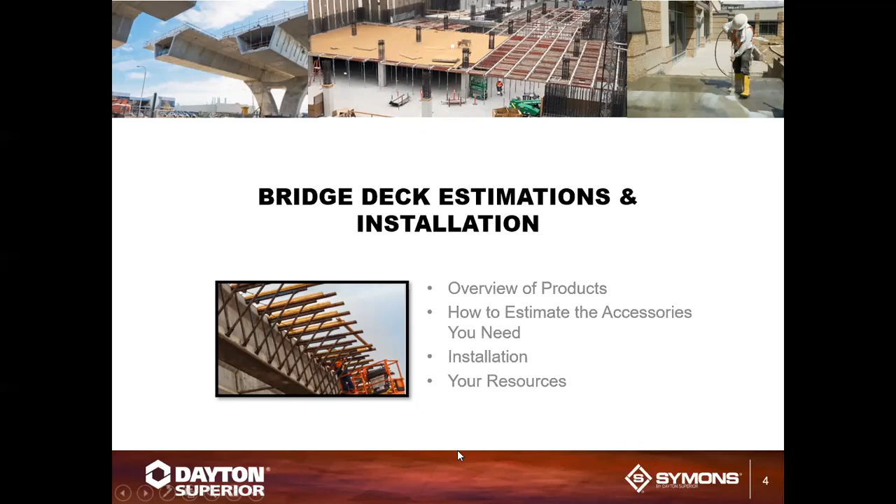So the bridge deck product here, we're going to be talking a little bit about cast in place, precast, steel, wood, concrete, supported on concrete or steel girders. We're going to talk about the sheathing, the joists, the ledgers. Those items typically aren't seen as often as they used to be because now most of the decks are actually going with either a composite fill or concrete plank or an SIP decking.

SIP means stay in place, corrugated metal decking. But we'll talk a little bit about overhang brackets and the accessories that are needed, all the formwork that goes with it, walkways, paving machine loads, because that is a huge product item, especially when you're talking about bridge deck.

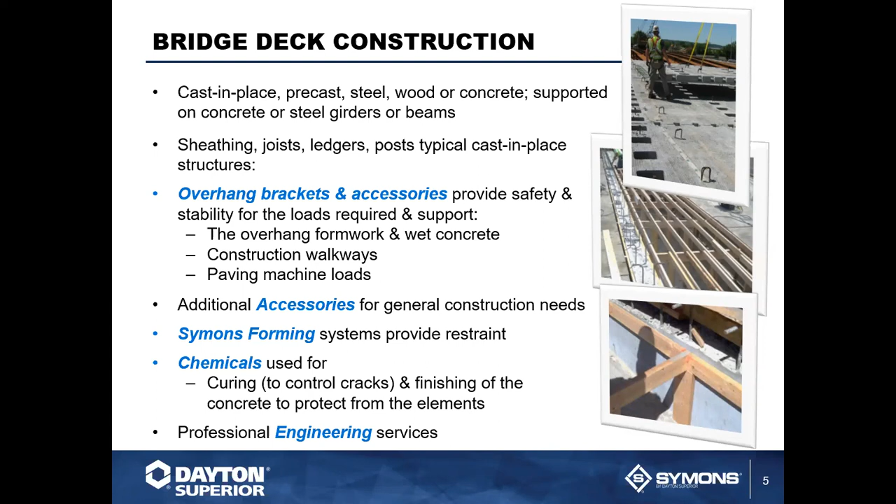Additional accessories, basically, that are going to be required and used. We'll talk a little bit about Symons systems that are relevant within the system, and obviously chemicals, curing to control and finishing the concrete to protect from elements. And then obviously we're going to talk about our engineering services.

So let's start with the overhang brackets. Overhang brackets, the C49 standard bracket, probably the most copied bracket in the marketplace. This bracket has been around for about 40 years now.

It is used basically continually across the country. You can adjust this bracket from 14 inches to 30 inches, or if you go with the deep bracket, you can go up to 70 inches with it.

We also have the S bracket, which is the field modification of that C49, where you're actually going to take it from 30 inches, which is the standard length, down to about 14 inches. And that can be done with basically a removable one pipe.

We also have our junior brackets, which typically are used in those tough to fit locations where you don't have 4.5 feet between the old structure and the new structure. Or if you're doing work downtown, you may not have 4 feet between a building and the edge of the bridge. So the junior bracket comes into place.

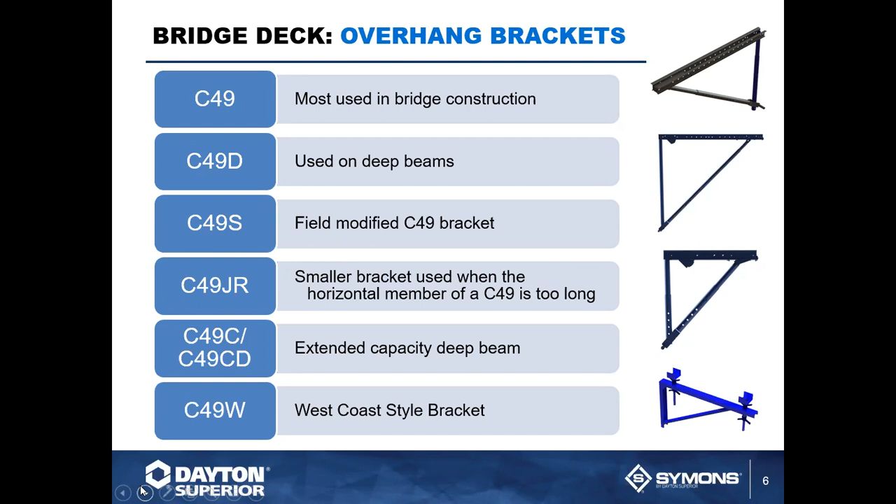Well, supporting all those brackets actually comes from the hanger. The hanger is actually one of the key components, what I would consider the second most important part, because it's the one that actually holds the bracket in place for the overhang. And the brackets can come in a multitude of different styles and configurations. Here we just have about 6 or 7 different configurations.

We can actually, all the hangers are typically made to order. We do not stock any hangers on the shelf. If we have any on the shelf, it would be a C24 style hanger, as those are the most common half hangers. But whether or not it's a type 1, type 2, etc., would be based on your location.

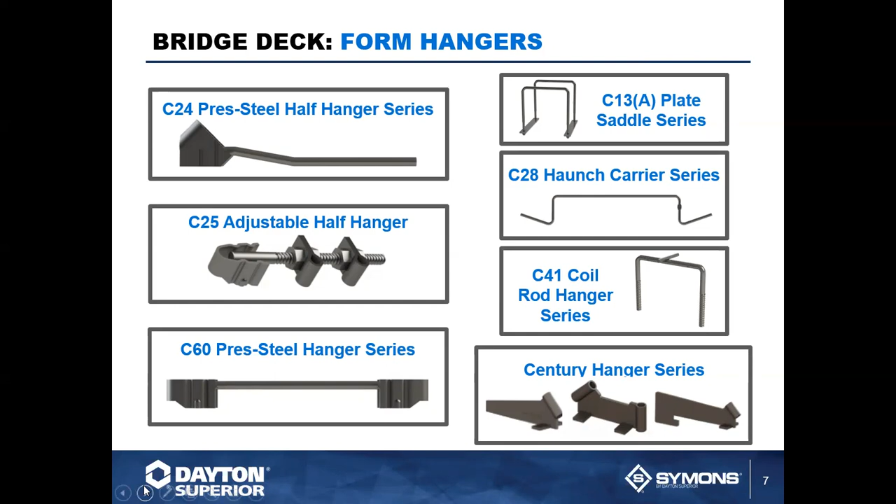With those hangers, steel beam requirements, we've got hangers that will wrap around steel beams, straddle over the top of them. We've also got precast hangers that cast in place in the concrete, and you can get those with a 45 or 90 degree end clip.

The end clip is what decides what the hanger is going to be used for. Typically, a 45 degree clip is used for an overhang bracket, connecting to an overhang bracket. A 90 degree is typically attaching to a wood forming member.

We can do precast hangers, and once again, they are made to order. The standard is a 6x4x2, but we can do those hangers up to 48 inches by 6x2, just so you get back in that concrete platform of the deck of the bridge beam, where you have enough meat to actually hold that anchoring force.

We can put steel plates on the end underneath the clips to spread the load design out on the edge of the girder, so you don't have to worry about chipping the concrete girder. And once again, these are all made to order.

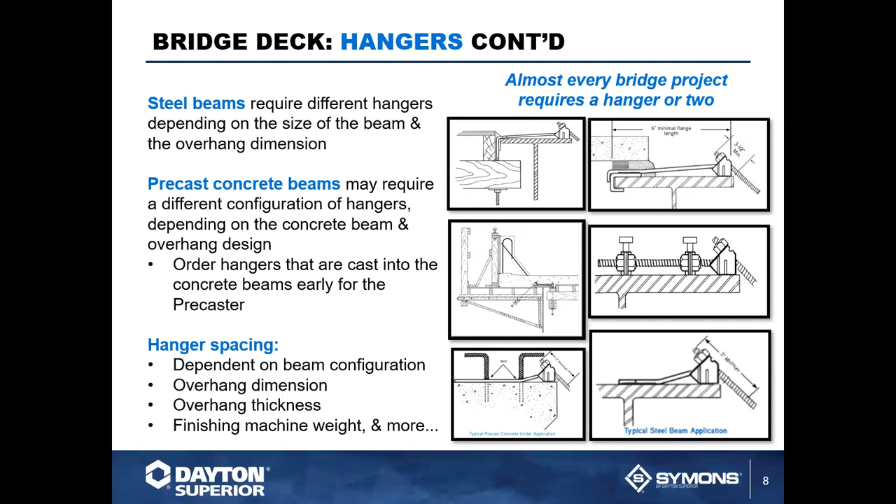So typically what you've got is 1/2 inch by 24 adjustable coil bolts that are going to be used. Those are a preference that I have in the marketplace. It is not the only item that can be used. This is what holds the overhang bracket to the hanger.

I like it because it has the adjustable nut on it, but what it also gives you is that one nut at the very bottom that is welded. When you're ready to strip the bracket, that enables you to loosen it up with a wrench, so you don't have to damage any of the threads, making this component piece reusable.

24 inch is preferential. I've seen guys come in with 18 inches, then try 20 inches. I like the 24 because that fits whether or not you have to have a high haunch or low haunch on the overhang, whether the bracket is sitting flush or if it's sitting down just a little.

The adjustable coil rod will actually make that bracket easier to adjust. You can also use standard B12 coil rod with a nut in lieu of that, but to strip it, you're going to have to muck up the threads on the coil rod to get it loose. You'll have to hook onto it with a pair of vice grips or a pipe wrench to actually break that loose.

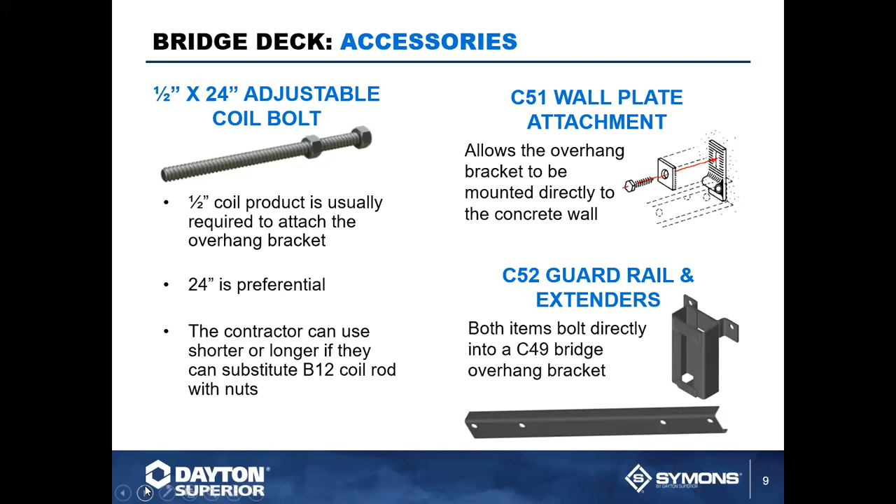So then we have bar supports. Bar supports are the next important item that we have in the deck.

Typically, whether you're forming on concrete plank, wood decking, or SIP decking, we can supply the slab bolster for that need, whether it be galvanized, epoxy coated, stainless steel, all plastic, etc. We have a complete array of slab bolster, including the plain metal version, which we don't see a whole lot of anymore, but most of the jobs are going typically epoxy coated or galvanized.

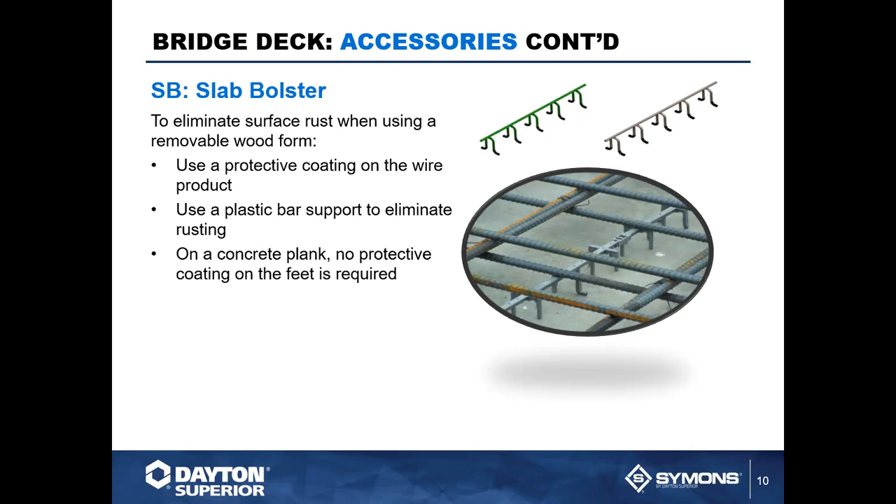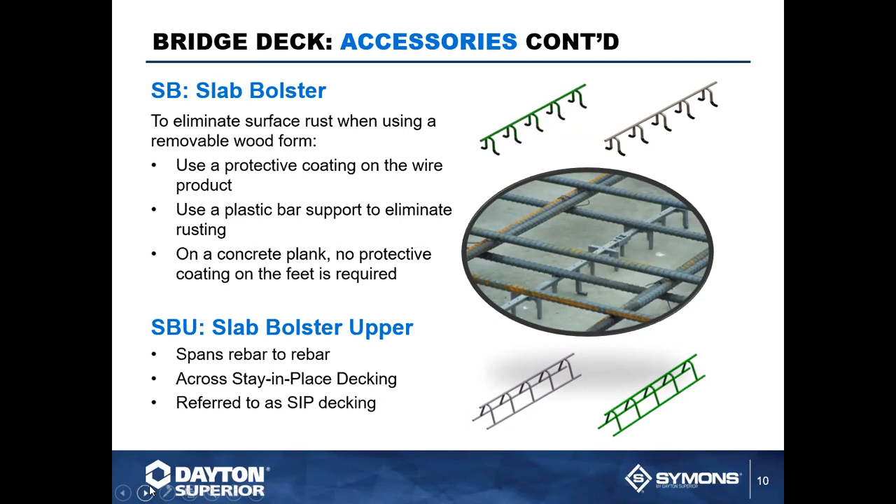We also have the upper material. Once you put the lower material on to touch the formwork underneath, which will typically have a plastic barrier on the feet, you go to the second mat, which needs to be supported by slab bolster upper. Slab bolster upper is a critical component because with SIP decking, you're going to use slab bolster upper on your lower deck and on your upper mat of rebar.

So let's talk about how do we estimate the deck. Well, typical bridge deck. You're going to look at a set of plans here. This is a typical Ohio bridge. This is a plan view of the deck or a detail of the beam.

You've got basically the framing plan from end to end located on this one. You'll also see that we have here our steel. This is a steel beam structure, and the steel beam is detailed out here.

Now a lot of times when you use steel beams, the steel beams typically will come in a couple of different forms or fashions. It will have a build-up girder or will be a standard extruded beam. If you have a build-up girder, there's a good chance you're going to have multiple hanger widths on it because the beam flange on the top side of the girder is going to change. And they will typically change in both the tension and compression zones of the bridge.

And what we're concerned with is what's going to happen up on top. Typically in a tension zone, because of the way the camber is of the bridge, it's basically an arc going up over the bridge. And when the concrete gets on it, that beam is going to settle out. What happens is the concrete beam actually has to have those tension and compression zones stretch and contract into areas, so that when the beam flattens out, we don't do any damage to the girder itself.

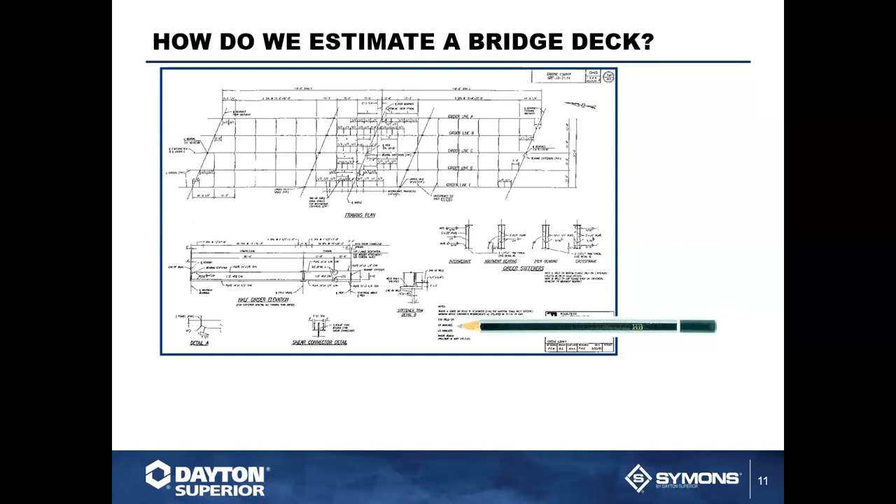So here, you also will have a section view. The section view is now going to give you all the other details that you need for how to calculate the overhang bracket. There's a bunch of information on this page. Realistically, these are probably the two most important pages on the plans that you will need for a bridge takeoff.

Typically, this is going to give you your overhang, your rebar size, your rebar coverage on the top from the top of the concrete deck to the rebar, and also from the bottom of the concrete deck to the bottom of the bottom mat of rebar. You will have to calculate the space in between.

I would recommend going to the how to calculate slab bolster presentation that we did a while ago here for a Training Tuesday. That will actually help guide how you actually run that figure. But you'll also get all the rebar sizes, any lap lengths, any special conditions within the deck, all listed on these pages.

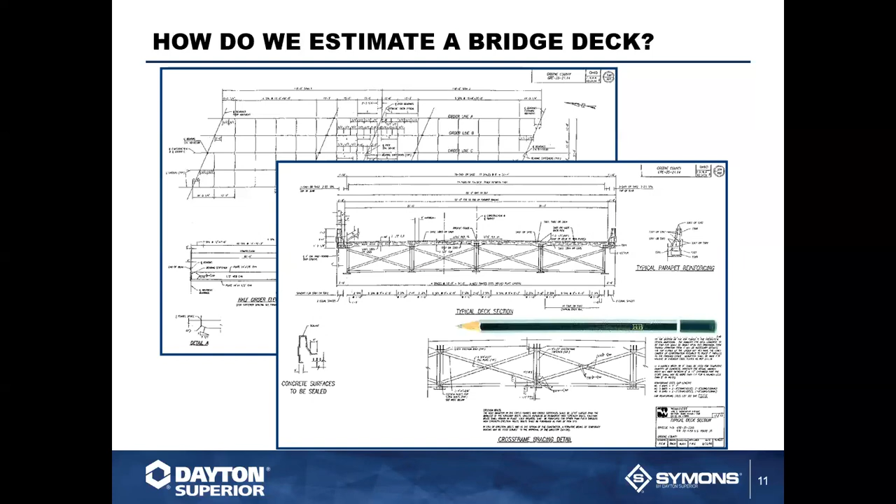So let's build a quick estimate here. Remember, when you get your plans - yeah, I had a guy send me about 4,000 plans, that's 4,000 pages the other day. Of the 4,000 pages, I think I needed 3 pages to actually calculate the deck, to do the whole deck calculation form. So you don't really need to have the whole set of plans. You're basically just looking for that section view and the plan view of this product line.

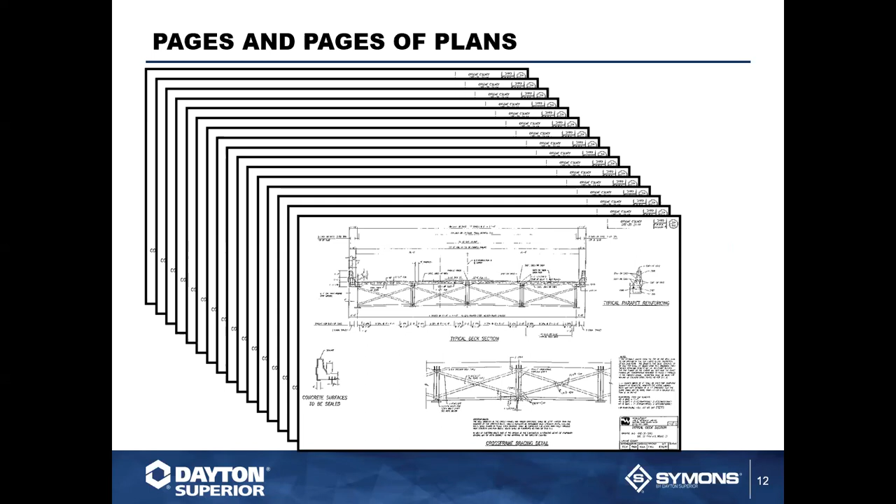So basically what you're looking for is the overall length, the girder details of spacing, the deck thickness. Obviously the concrete thickness of the deck is going to play an important part on the weight that's put on the overhang bracket and the hangers.

The width of the bridge comes into play because of the finishing machine. The finishing machine is not your friend. The weight of the finishing machine is probably 85 to 90% of the weight that the overhang bracket will have to support. So with today's wider bridges, because we're having to build bridges wider and wider as we keep adding lanes to highways, you end up having a heavier finishing machine.

When the finishing machine starts to get up around 2,500 to 2,800 pounds per wheel, well, that only leaves you 800 or 900 pounds per lineal foot of concrete that you can add. So you're talking, you've lost a lot of capacity of the bracket because you're having to take into consideration the weight of that finishing machine.

So with that being known, the contractor will have to give you that information. That is something that cannot come from Dayton Superior or any of the dealers out there that are looking at it. This is something that the contractor will have to give, because we don't know what kind of options they have on their finishing machine, etc.

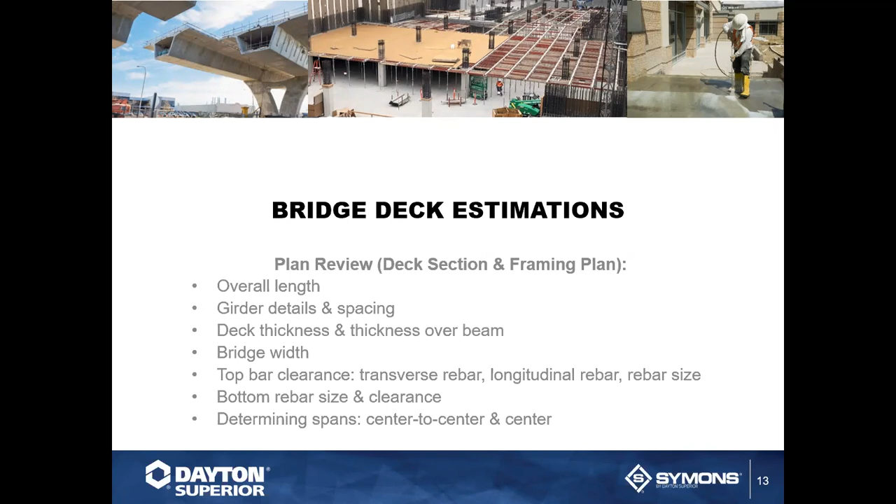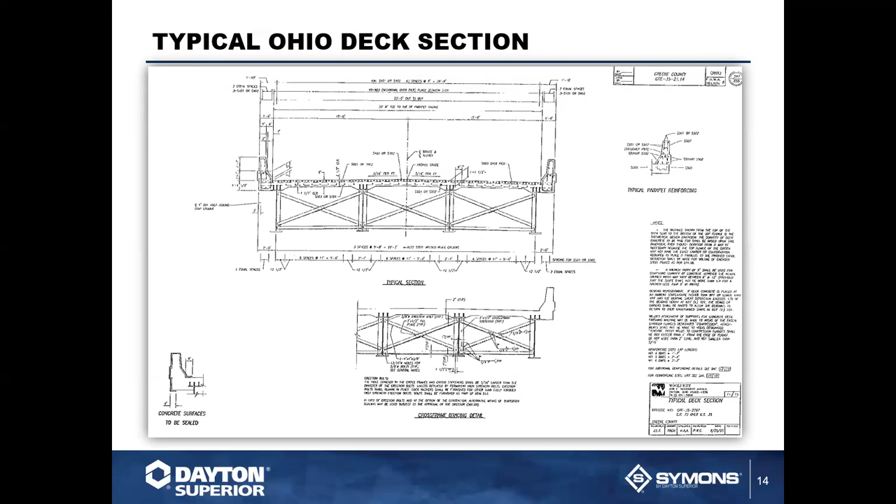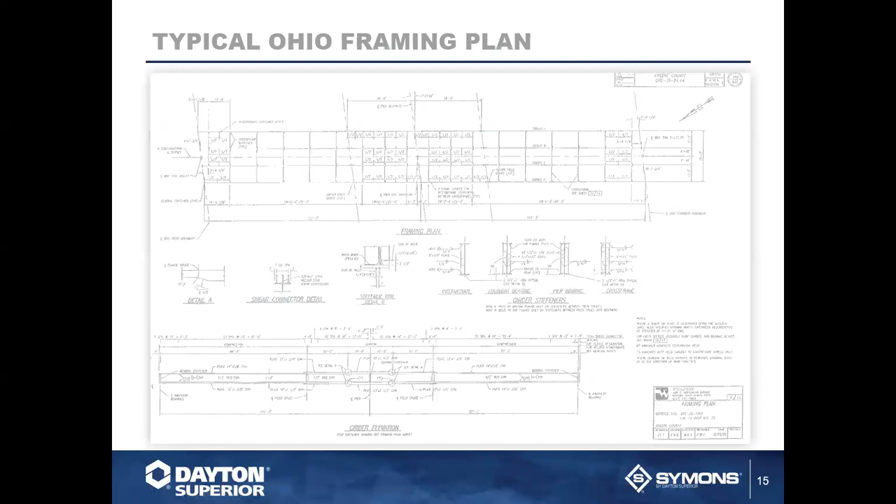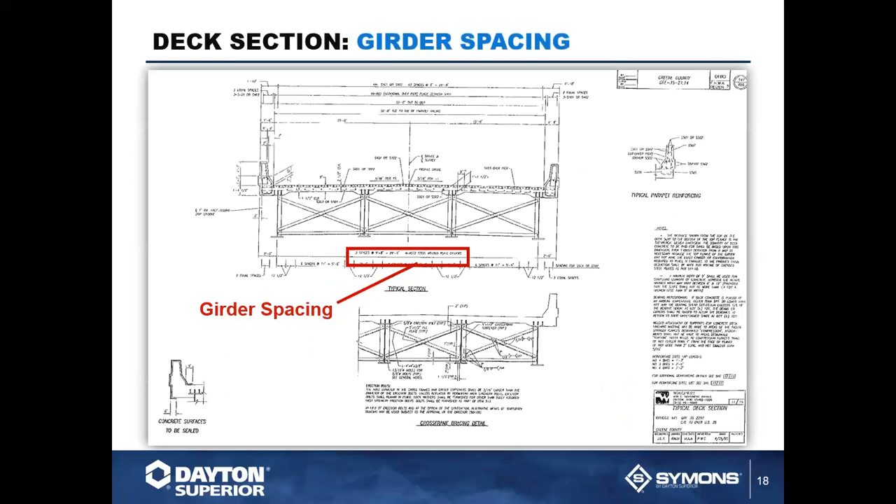So here we have the overall length. You have the girder details. You have the girder spacing. You have the deck thickness.

You have the deck thickness over the girder, because a lot of times that will change based off of what the haunch is required, because the haunch is a figure of how far up they're going to raise the slab, the concrete deck slab, typically so they don't have to pour the full depth from the top of the girder to the top of the deck.

That distance is typically whatever the deck thickness is minus whatever that haunch distance is. A lot of times bridge decks have a 2-inch haunch on it. That enables them to maintain a consistent 8-inch or 10-inch deck thickness from end to end of the bridge.

Sometimes engineers get a little carried away, and what you'll end up having is a 10 or 12-inch deck on one end of the bridge deck, and you may not have but 8 inches over the dead center part of the bridge deck. So what you're seeing is a thicker bridge deck going on.

This does two things. One, it adds cost to the contractor, and we try to eliminate a lot of that wasted cost with them. Two, it actually ends up causing a lot of forming issues, because added weight means you may have to go with heavier forming hardware.

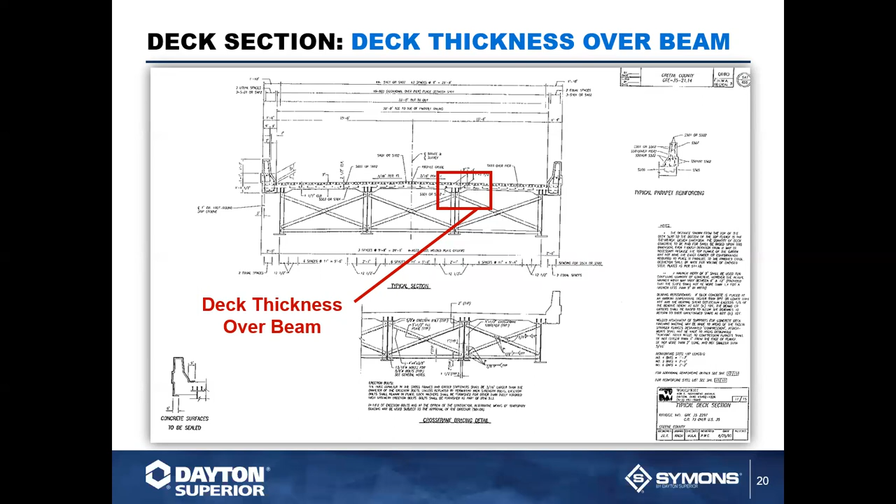From there, we have our bridge width here from out to out. You see where the out to out is located. It's the top figure there because you want to go all the way out to the edge of the bridge, because that's where the finishing machine will be set up for, and that's typically where it will run off of, off the overhang brackets. 90% of the projects we see today, the overhang bracket is actually supporting the finishing machine.

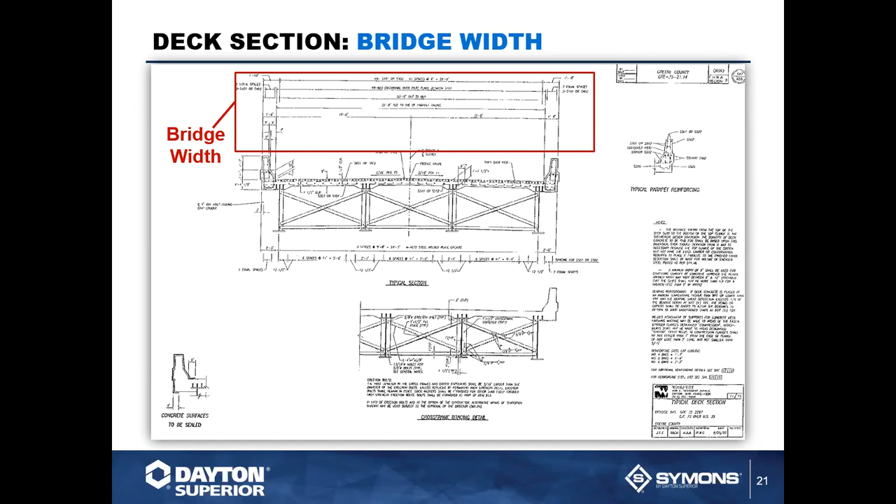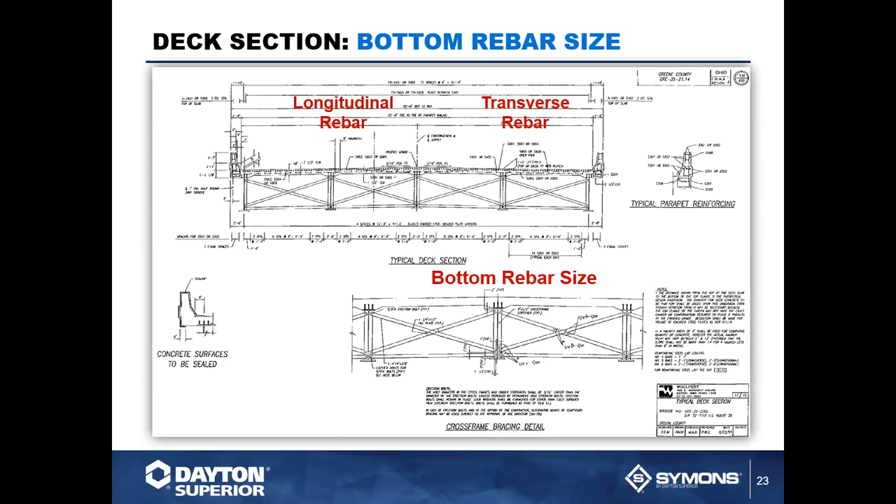For top bar clearance, we get that on the same page here. We get our rebar size, whether it be longitudinal rebar or transverse rebar. We'll also get our bottom rebar size from the same pages.

And we also get the bottom bar clearance, which is typically a figure that we see usually right in this area here. You may see it shown in 2 or 3 locations on the bottom half, underneath the deck, where they'll say the concrete coverage is.

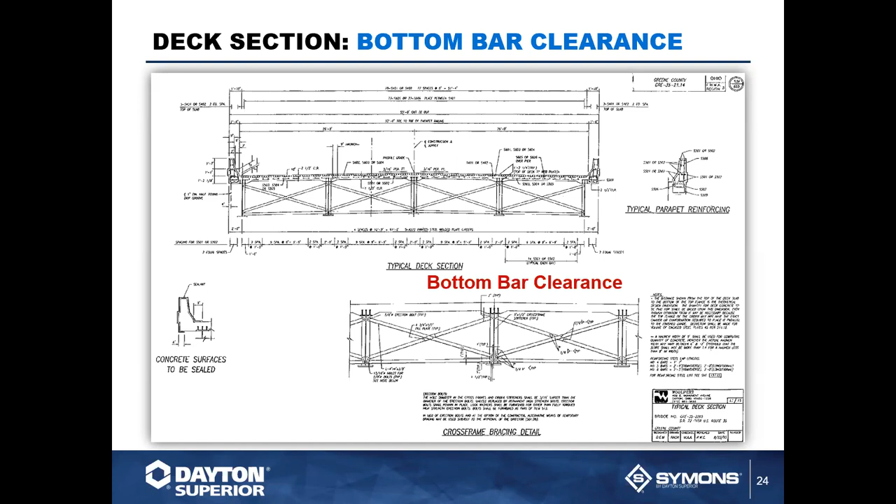From a typical deck section, you can determine the center to center from the girders. Typically, if you are doing removable wood form, the center to center is going to determine what size lumber you have to use for your forming hardware and what size hanger you have to use to actually support that load.

And typically what you want to do is match up your interiors to your exteriors so that everything lines up across. Because if you can't do that, it gets a little convoluted. It gets real crazy trying to calculate the location of all these hangers, where they're going to be.

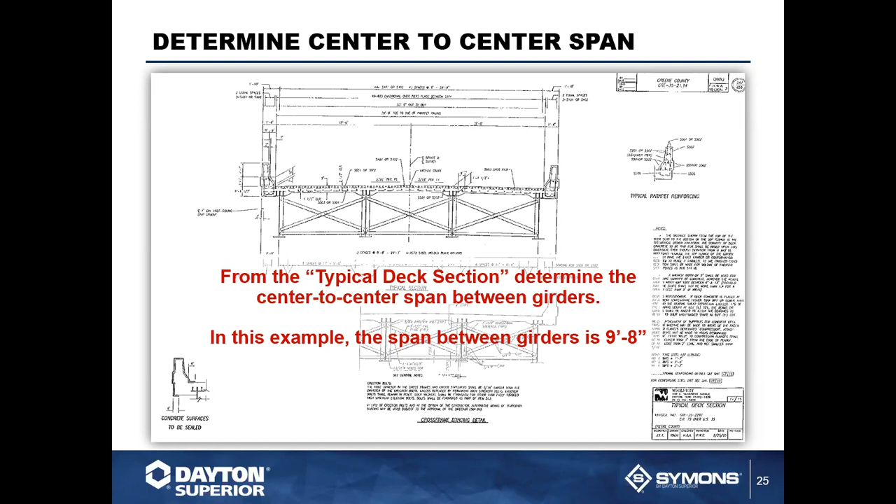So from the framing plan, we determine the top plate of the girders. Typically here it's got a 14-inch girder on top and a 22-inch. Now thicknesses will also be listed there, so if we have to have any hangers that wrap around, those thicknesses will be associated with either the 14-inch or the 22-inch also.

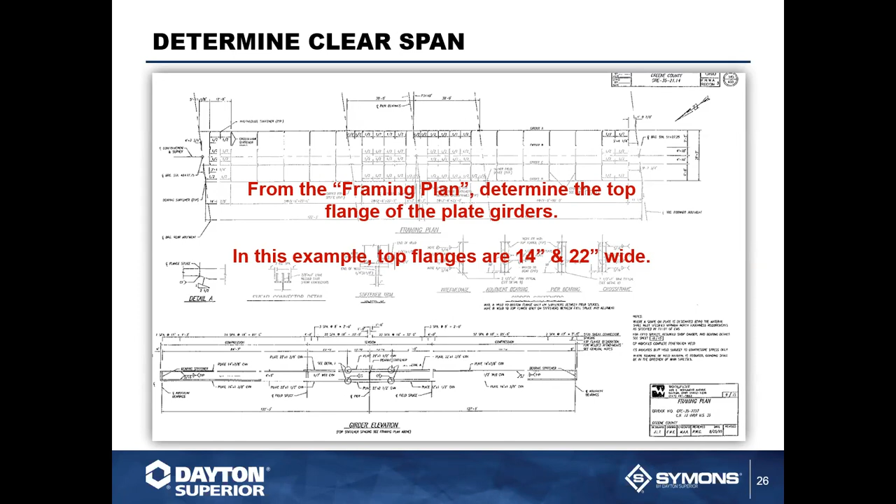Typically you always pick the smallest flange width to run your calculations, primarily because that's the worst case scenario. So here we've got 8 foot 6 inches. We have a 14-inch beam flange, so we deduct: 9 foot 8 center to center minus the 1 foot 2, comes out with a 102-inch clear span for this example.

So typically here we've got, let's say, an 8 foot example with an 18-inch beam flange and 8 foot clear span. You determine that the clear span is actually 6 foot 6 inches. That's the distance we have to design the lumber around, so we're only designing in and around that 6 foot 6 inches.

That relates out to, you just pop the numbers into the formula where you're taking the center to center minus the beam flange thickness, the total thickness, because it'll be half from one side and half from the other side. So here it gives you 102 inches for this project.

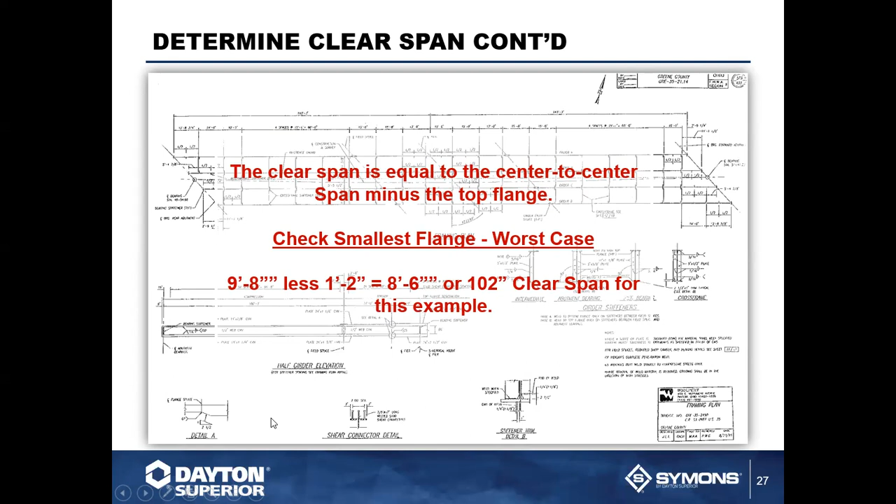So with that being said, you're going to know what size lumber you have to have. We have charts in our bridge deck handbook which will tell you for an 8 foot spacing, typically if you use a 6,000 pound hanger, it's going to be about 4 foot maximum. 4 foot max is typically the maximum you want on the interiors, primarily because of bending stresses within today's lumber.

So let's start out forming here. We've got our lumber put in place, all the dimensional lumber put in, formwork, joists, ledgers, plywood. It says we have to have 1.5 inches of coverage on the bottom.

So typically, from each beam, you're going to put a row of bar supports that runs parallel to the girder. Now that length off the girder, it may be a foot off of it, or 6 inches from it, depending on the width of the girder.

You're going to then base this off of having a 6 foot 6 inch clear span. I may put one row right on the edge of the plywood and one on the other edge of the plywood, and possibly one in the center. More than likely, most contractors would get away with just 2 rows on this bridge.

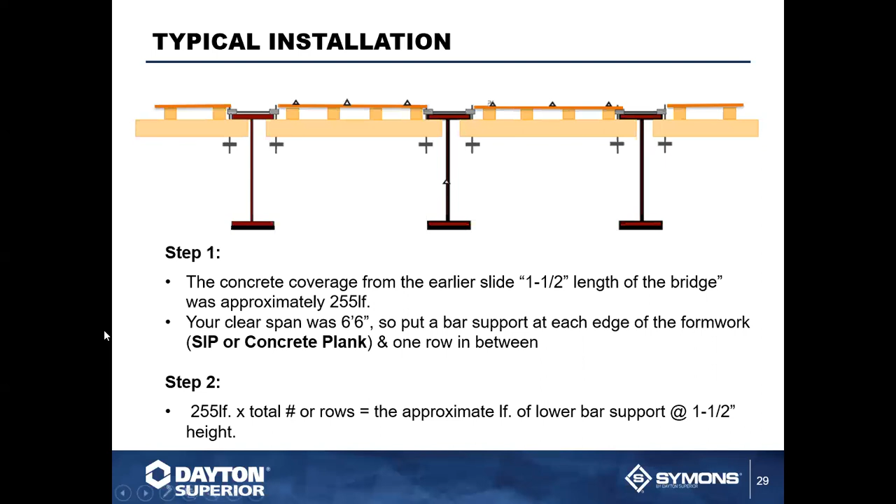That's something that the conversation has to take place with the contractor. So typically, you're going to take the number of rows you've got set up per bay, and multiply that by the 255 lineal feet of length of beams. That gives you a grand total of how much bar support you're going to need for the bottom mat.

Now let's calculate the upper mat. We had a 33-foot wide bridge. We're going to calculate the distance between the rebar by taking the deck thickness minus the bottom coverage, minus the top coverage, minus the top rebar thickness and the bottom mat rebar thickness, and that remaining number will be the size of the rebar support put in place there.

Once again, you can see rebar, what type and size and how much to calculate. That presentation actually goes into more detail than we have time for here today, unfortunately. So what you're going to do is drop your mats, all your mats, into place.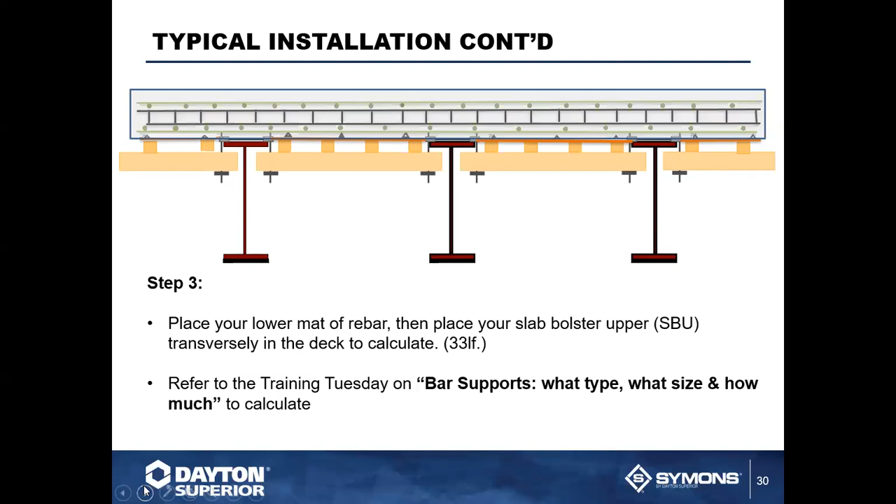Here we've got 255 lineal feet, that's how long the bridge was from abutment to abutment. Divided by 4 lineal feet, because that's how you want to space rebar supports, no more than 4 foot on center, that gives you 63.73 rows. I'm going to round up to 64 because you always round up to the next row, and then you always add one to start with.

So therefore, you've got 65 rows times 35 will give you a grand total of 2,275 lineal feet of slab bolster upper that you're going to need at a minimum. That includes no lap or anything else. So typically, if you were to have to lap, I'd add 5 to 10%.

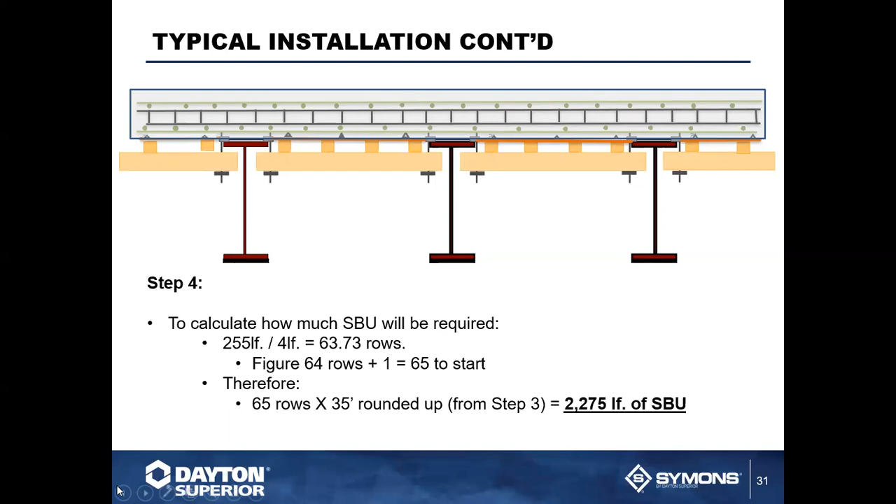Since we had a 2-inch haunch, a 1.5-inch bottom cover, and beam flange thickness, I would use a 4.5-inch E-Z Chair out on the overhang, an individual chair. It primarily has a small footprint, basically supported on lumber typically used in fascia overhang forming, and that can actually be slid in or slid out depending. That's never an exact science, but at 4.5 inches, based off of this, you can get pretty close to what you're looking for, and typically I run them about every 2 foot.

For the whole deck, you'd need 255 pieces roughly.

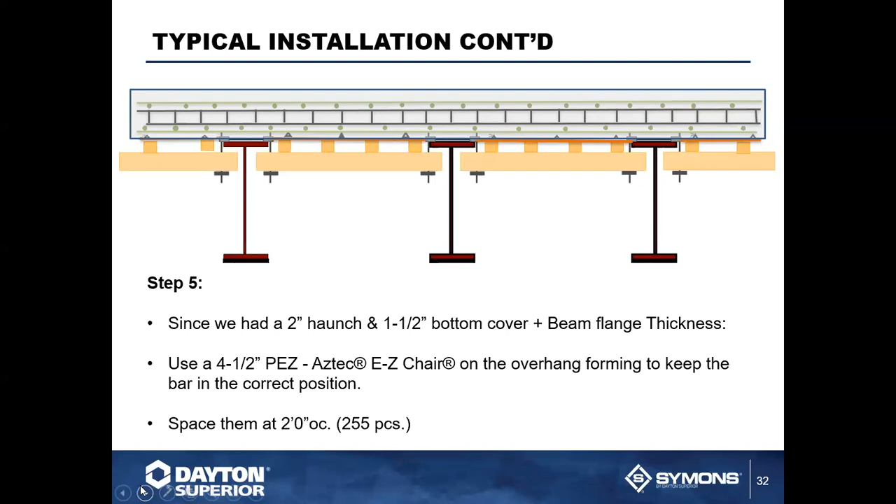The finishing machine is a great product to come in and finish off the top of the deck. The problem is the weight of the finishing machine is contradictory to the capacities of the overhang bracket. It isn't a system that's conducive to the overhang bracket, because finishing machines are getting larger and stronger so they can span wider areas, which takes away from the capacity of the overhangs.

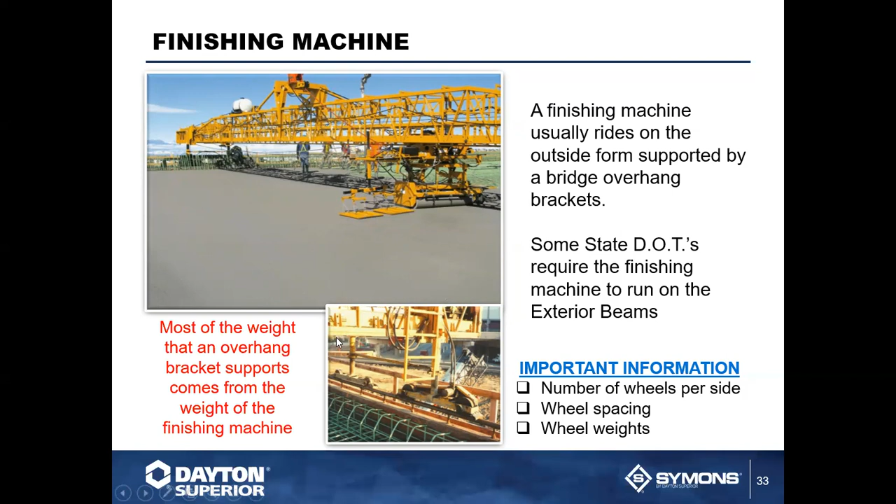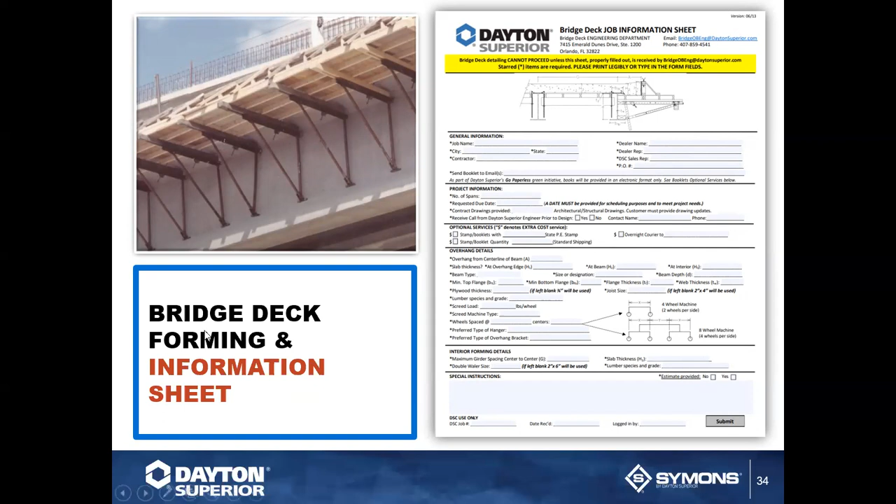To do all this, we have our bridge deck information sheet. You can get this online on our website, DaytonSuperior.com, print it off, send it to your contractor or engineer, and they can fill it out. We can run the calculations to get a calculated printout sheet for them, which would look similar to this and give you the overhang bracket spacing.

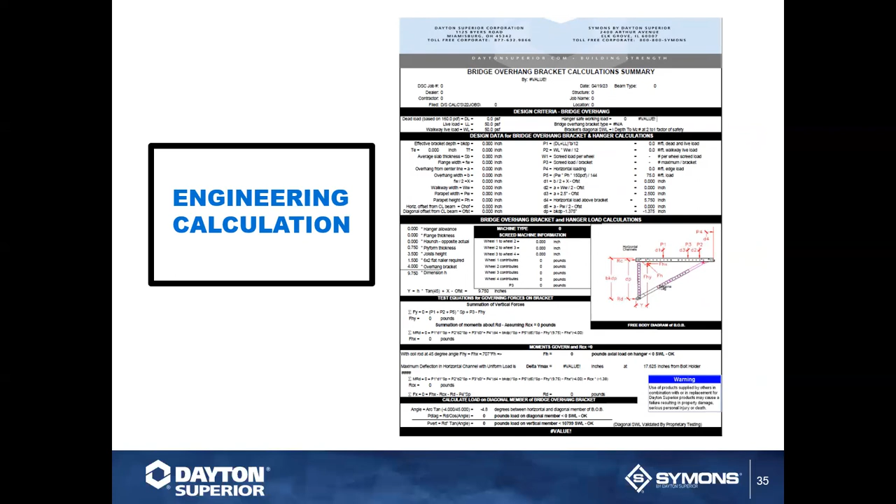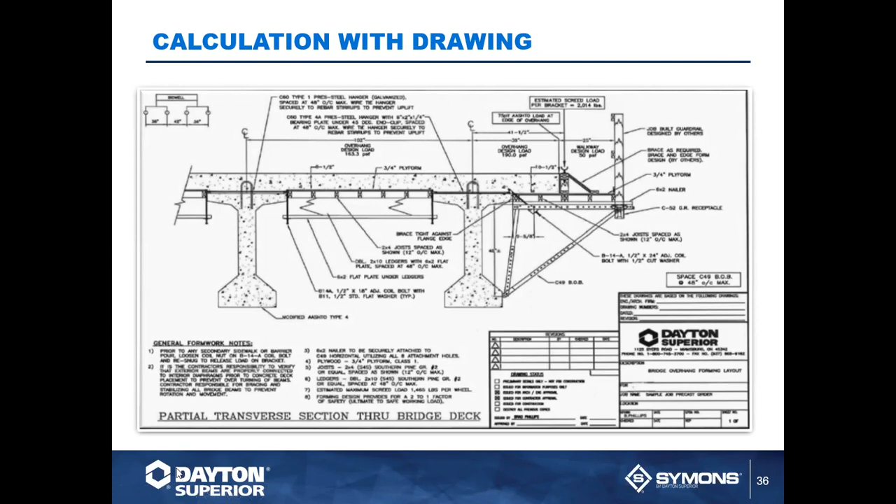There'd be adjoining pages that coincide with the interior spacing, and all of this is basically a billable item. But typically a lot of this can be submitted to the DOT as a pour record, because the state wants to know how you calculated all of your pouring of this bridge deck. We can also provide a drawing with that, so you can get a drawing to accompany it, and we can put a PE stamp on it.

At Dayton Superior, we have additional resources. You can go to DaytonSuperior.com to get any of the tech data sheets, handbooks, e-marketing, product pages, even the engineering calculation sheets. You can also find your contacts, your customer service people, any of the technical engineers, and obviously training.